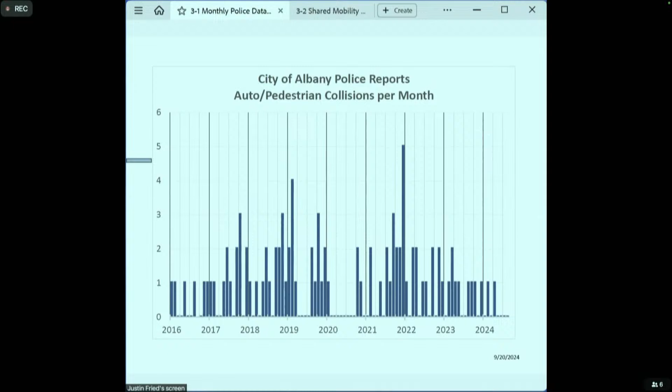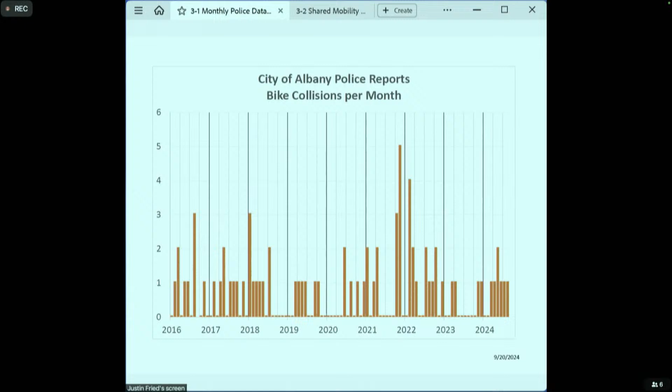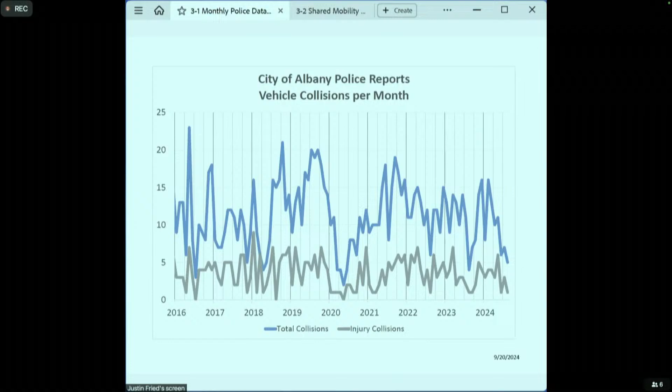Thank you, Chair. First presentation is the monthly police data reports, presenting for the months of July and August. There were 0 pedestrian-involved collisions for both months. There was 1 bike-involved collision reported in each of the 2 months. There were 7 total collisions reported in July and 5 in August, and of those collisions, 3 were injury collisions in July and 1 in August. There were 62 citations issued in July and 50 in August, and 4 DUI arrests were made in July and 3 in August. That concludes the police data report.

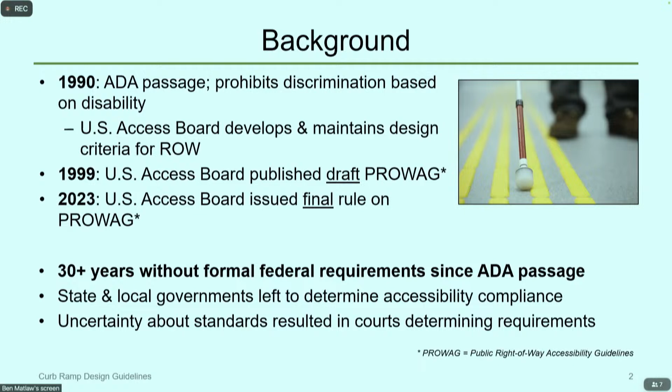To talk briefly about project life cycles in general, it should be obvious, but we want to finish any design modifications during the design phase. We don't want to change design unless there's some kind of unforeseen technical issue, like digging up a utility that was unknown and having to work around it.

There are a few reasons we don't want to make modifications after design: significant cost increases, risk and dispute issues escalate especially with the contractor, and it's generally just not as feasible without additional funding and time. We're locked into a contract, for example, in the construction phase — you can't just tell them to hold on, we need another month or two to work something out.

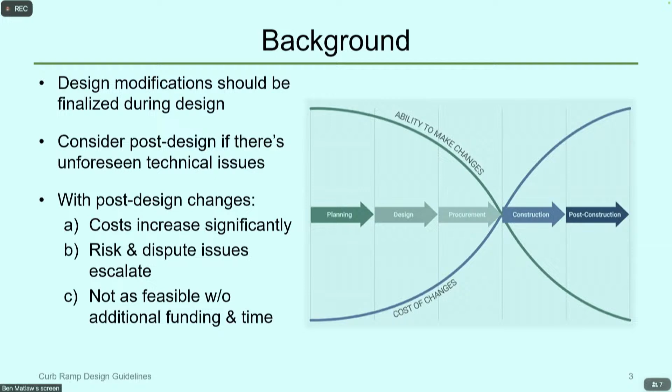So the intent of the curb ramp design guidelines is to help formalize and streamline that project delivery with curb ramps. It will become a formal reference for city staff and consultants.

Its ultimate purpose is to generally describe site constraints when we're working in the right-of-way — what constraints need to be considered when designing for curb ramps — generally summarize the ADA and PROWAG requirements, and summarize the City of Albany's discretionary preferences, which are recommendations from the Transportation Commission on curb ramps. Ultimately, it provides guidelines and a methodology for selecting preferred curb ramp types and details.

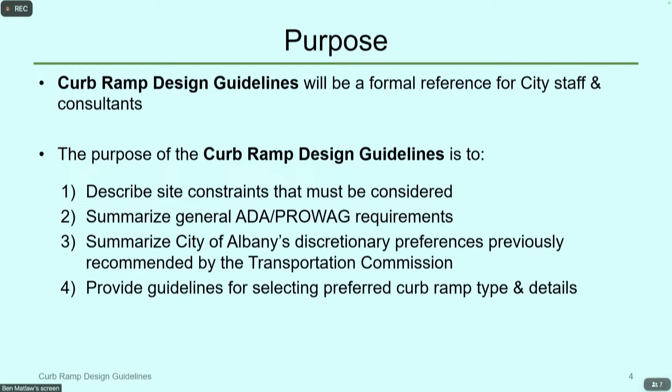So there's a lot I need to get through to set this up and talk through these preferences. We're going to start with constraints and requirements — what needs to be considered during design and what must be part of a curb ramp — and then move to discretionary preferences and the design toolbox.

The preferences in particular is where we're looking for further comments and confirming some of these preferences with the commission — discretionary preferences meaning what the Transportation Commission, as the right-of-way reviewer for these designs, has directed staff to look at.

Our design toolbox informally covers some of the things we include with curb ramp design regarding safety and aesthetics, to try to formalize our designs. That leads to our curb ramp selection methodology — weighing all these requirements and preferences to determine how we select a curb ramp at a given corner.

Looking forward, very briefly, the curb ramp design guidelines are intended to be a living document, so looking forward involves a few things that may affect the document in the long term.

So with that, I'm going to jump into constraints and requirements. And at any time, if there's questions, feel free to stop me.

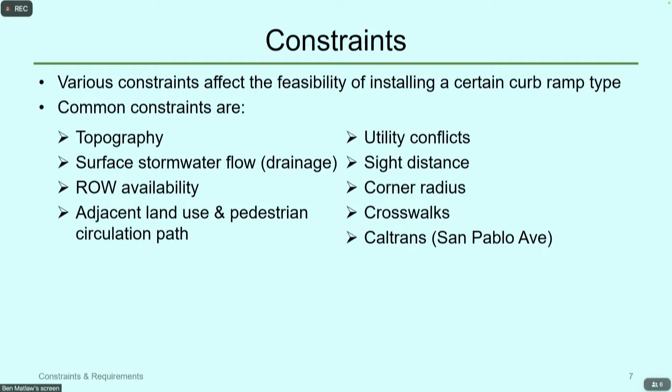I'm going to go over a few of these in more detail because they're generally the more important ones and have larger effects. One of the major ones being topography.

Hilly areas require some exceptions to preferred curb ramps because we need to balance a few things: accessibility, safety, drainage, road design, that are more tricky in irregular topography. When you're working with crosswalks and curb ramps, there's very prescriptive grades and cross slopes, even if there's pretty extreme grades in the roadway.

And it being a hill, drainage is more of a concern. Water typically will go from the high to a low point, just physics. So if you're introducing a very sharp slope, it's going to move down that hill a lot faster. You can imagine a fast flow is more likely to run up a ramp. If it's moving fast enough and pooling in a certain spot, it can get over a curb quicker. There's a higher potential that, if you're not thinking about drainage, it may end up flooding back of sidewalks and getting into property. So it's a lot trickier on a hill.

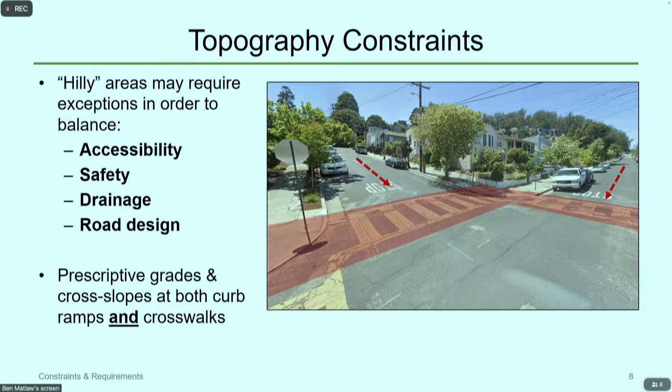Drainage is a constraint regardless of where you are. Hills just make it much more difficult.

Here's a cross-section of a typical right-of-way. You have sidewalks, potentially a planter strip, then a curb, and in the middle is your road. Roadways are typically designed, especially in Albany, with a crown - a high point in the road so that water flows into the low point, the gutters. That curb acts like a channelizing effect so that water stays within the roadway.

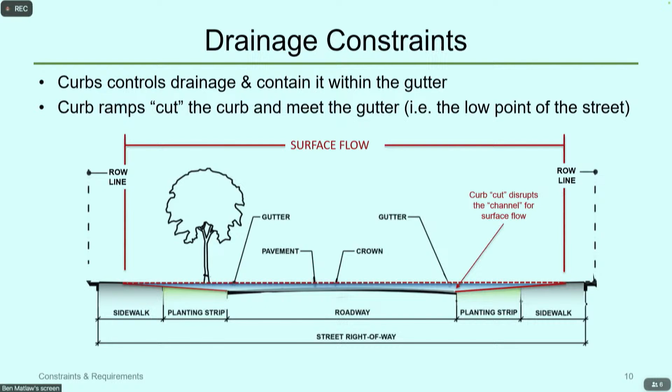You can imagine if we build a curb ramp, we are cutting that curb, which means flow is no longer channelized in the road. It has the potential of going up the ramp into the sidewalk. We are disrupting that channel for surface flow. No matter what you do, there is no way your curb ramp is not going to have some kind of ponding from stormwater - it's meeting the low point of the street.

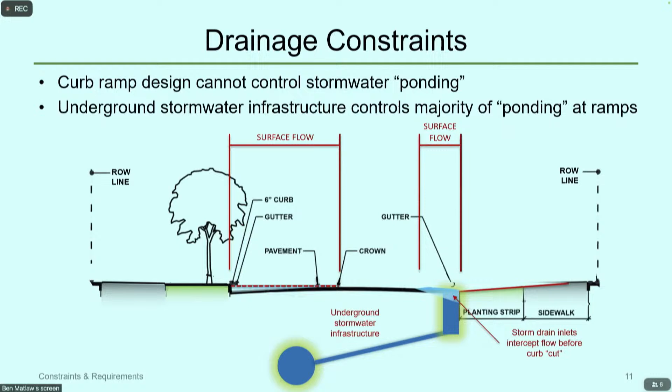It's just where the water is going to go - it's going to go to the gutter. The only way to reduce or potentially eliminate that is to intercept the surface water. You need stormwater infrastructure to intercept it so that very little or a nuisance amount is at the bottom of the ramp - not enough to be a barrier to anybody anymore. You cannot just design a curb ramp to control ponding.

Another major constraint, obviously, is right-of-way availability - just how much room do we have? It needs to fit in the space between the property line and the curb. There are ways to increase that space, with a curb bulb out for example, but that also complicates drainage - you're basically creating a check dam. You also have to consider if there are on-street bicycle facilities, because if that's the case, you may not be able to have that additional curb space.

Class 1 bicycle facilities also have more right-of-way considerations - that's like the Ohlone Greenway, the Buchanan Bikeway. You just need a wider ramp for those kind of crossings.

Now there's also, especially here in Albany, a tricky one: private property encroachments in the right-of-way. These encroachments do limit our usability, and that can be either softscapes like landscaping and bushes, or hardscapes like retaining walls and staircases. And even though they are technically in the right-of-way, they are still private property, so removal is complicated.

For softscapes like landscaping, removal is possible, but again, since we're removing private property, it does require us to talk with risk management, talk with legal staff, and talk with the property owner. You can imagine in a project with six intersections, four curb ramps apiece, four corners apiece, that could potentially be a lot to work with. And realistically, removing some landscaping may not actually buy a lot of room, but it could make a big difference. We don't really know until we're designing.

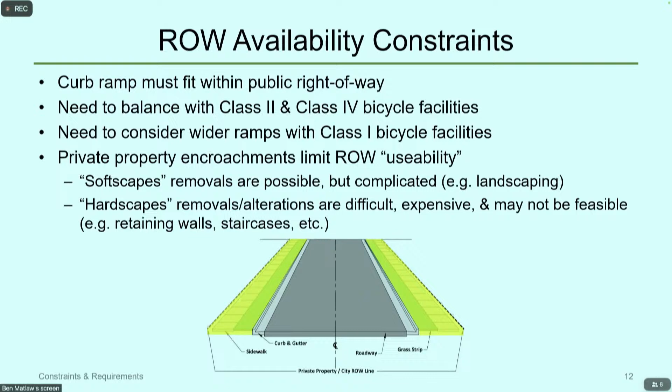Now, even given that, hardscapes are not as feasible to move around. Retaining walls and staircases get very expensive - it may not even be feasible in certain situations. And then there's also fences. Depending on their construction, they might be considered a softscape or a hardscape, but the more expensive and well-designed fences, the harder it's going to be to move around.

Crosswalk constraints - not a huge constraint, but I do want to touch upon this one because it does have an effect here in Albany, and I'll get into more detail later. Generally speaking, the requirement is that a curb ramp - and I'm talking about the ramp itself, not any flares - needs to be within the crosswalk width. It does not need to be centered within the crosswalk. So there's a lot of flexibility in how you place a ramp and a crosswalk, and how that may affect other design elements.

The only one that's a bit more complicated is the 444 crosswalk. That's because the intention of the 444 crosswalk is to have that blank space aligned with the curb ramp - otherwise you're kind of getting into a continental one. It's not technically required, but you go for a 444 because you don't want that interaction with the paint or thermo or whatever material is used. So that does restrict the flexibility a bit on how you place everything and how it may affect other design elements.

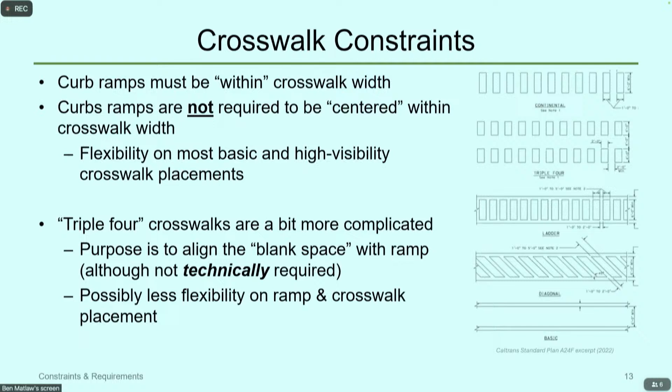And then lastly, San Pablo is a Caltrans right-of-way. Caltrans has final review and approval on our curb ramps, so we have to stick to their standards. We can deviate from them, but they need to realistically be justifiable and necessary. And ultimately, even if we think they're justifiable and necessary, they can still say no because it's their right-of-way and they have ultimate approval.

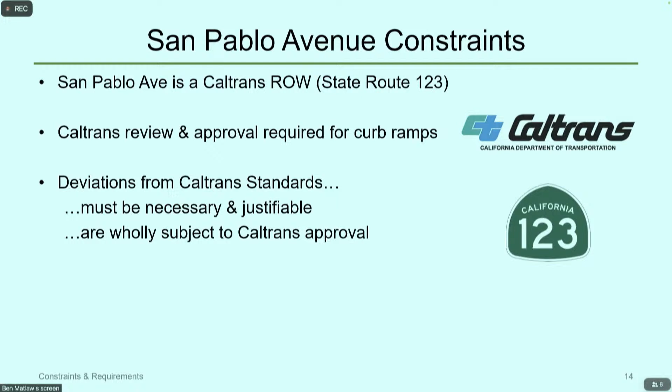So I'm going to get into the requirements very briefly, and this is going to help set up discussion for discretionary preferences, toolboxes, and then the methodology. But before I get into that, I just want to talk about what are the types of curb ramps. So we have our perpendicular curb ramp.

This is where - my laser pointer's not showing? Oh, okay. Gotcha. This is where, if you're using a wheelchair, the landing is at the top. This is where you reorient yourself to the ramp, and you come down the ramp perpendicular to the curb.

A parallel curb ramp is when you're coming down parallel to the curb, and then you turn at the bottom landing. The last one is a blended transition, and we use this interchangeably as a curb ramp, but technically blended transitions are not curb ramps - they have their own different requirements. They actually don't have as much flexibility with grades and slopes. They're defined as a wraparound connection at a corner, but I like the definition that it's a flush connection when there's no curb to cut through, because in terms of design, it's basically just an extension of a sidewalk. It doesn't have the higher grades that a curb ramp allows for.

To preface some of this conversation and discussion, I want to say that when you're designing, you may think of these curb ramps as individuals, but realistically you have to think of the corner as a whole. You have to think of the interaction between two ramps, because especially if it's a tighter right-of-way, you can't assume you put one and then go to the next one. You have to think of how these are interacting with each other and how they fit together.

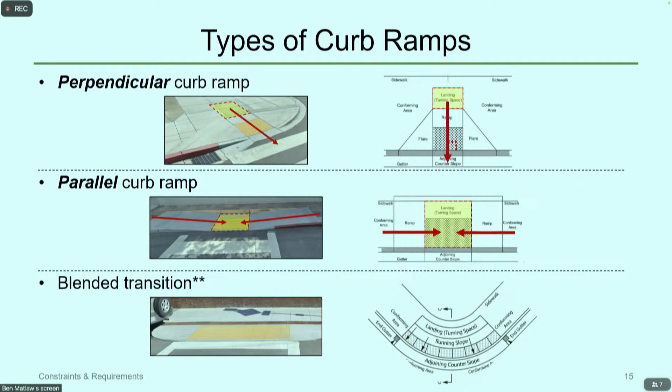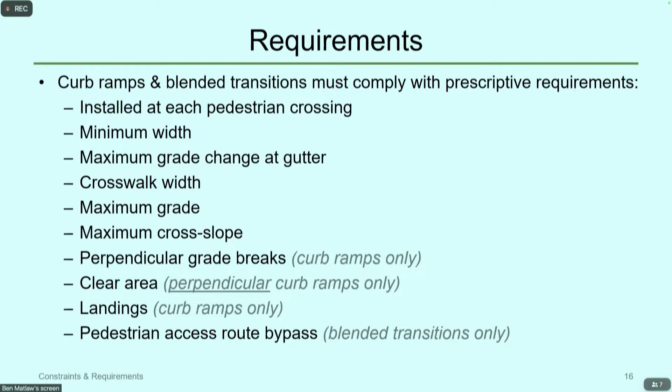Do you get a higher score if you make a mistake at a location with a higher number? No, it just haunts you forever — when you walk by there, you're just like, darn it.

Is it possible that it's impossible to satisfy all those constraints in a given crosswalk? In a given crosswalk, yeah — this is feasible. Satisfying all those constraints is feasible. Oh, you have to satisfy all this. And it's often done, but this is what makes it very complicated and why there's very little wiggle room when we're designing these, and why there often has to be a lot of iterations before we can say, okay, this is what actually works and meets accessibility requirements.

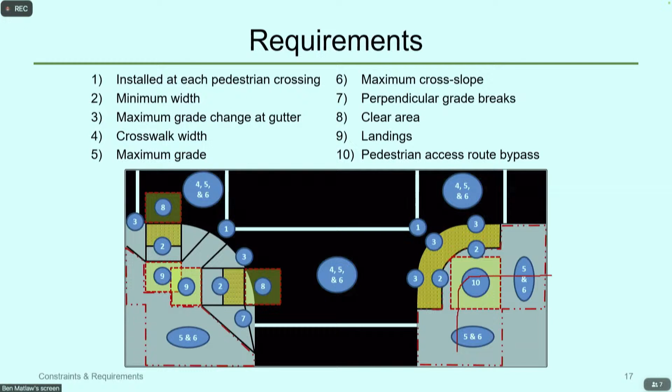Okay, so I'm going to go to discretionary preferences and design toolbox. This is kind of where we're looking probably for the most comment. It's something we can wait till the end to discuss, but feel free to stop me during this if you want to talk a little bit more about preferences, or if there's something we missed, because to our knowledge, this is the capture of everything that we've kind of seen during discrete projects in one place. So what are these?

As I said, these are previous recommendations by the Transportation Commission regarding curb ramp design and construction. These came up at different projects, and we try to remember them all in our heads, and now this is a document to write them down in. So these are specifically things that are not required by ADA, PROWAG, or the building code. These are optional features and preferences desired by the community, and we incorporate them to the best of our ability during design and then during construction.

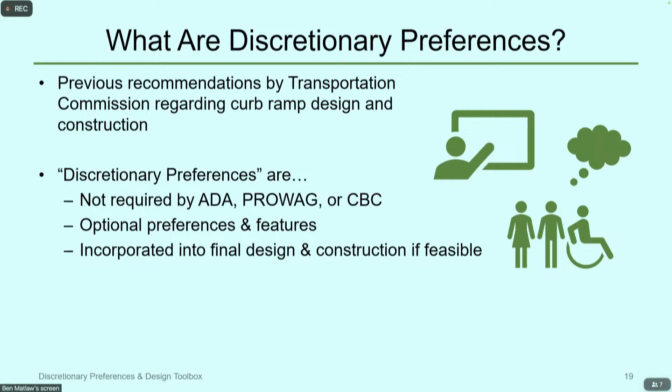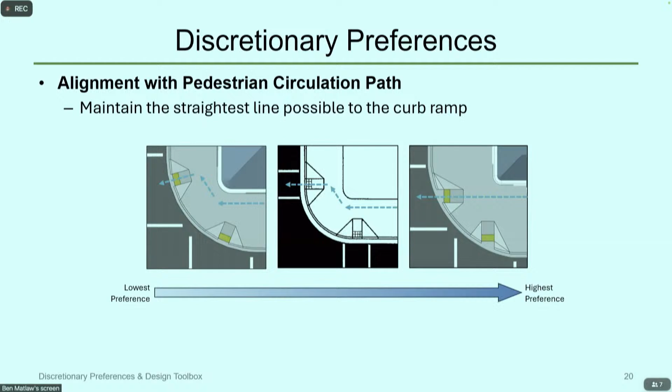Edge treatment: when we're placing retaining curbs, we want to make sure that they're not within the pedestrian circulation path. That way there's not any tripping hazards, and in particular that the corners of these retaining curbs are rounded. Now, I want to specify, it's been communicated that we want these rounded corners, but we are pointing out interior only because we want to keep Public Works' desires to keep the retaining curb at the gutter a straight line, and I'll talk about that when we get to our toolbox. Otherwise, these corners are rounded.

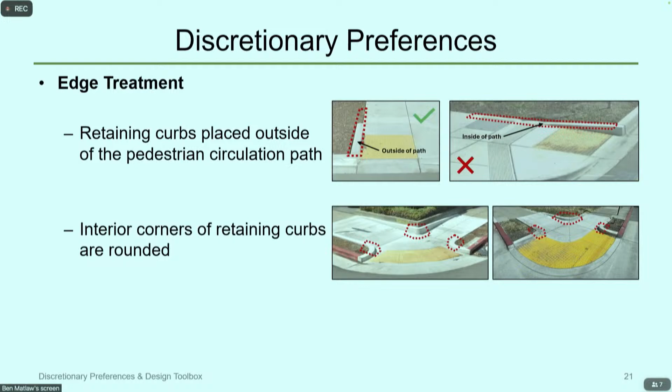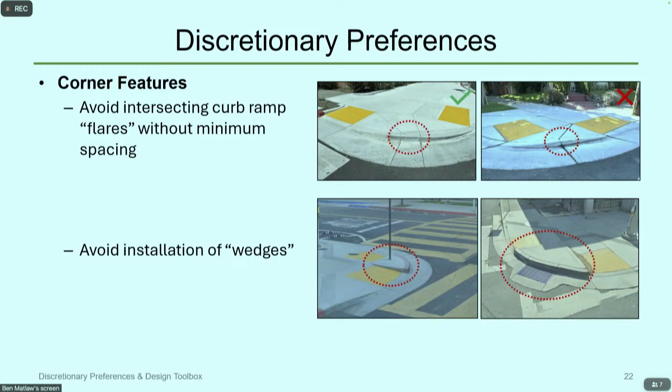There is less flexibility on crosswalk placement, as I mentioned. We can't move that crosswalk around. So if parking is a concern, there's an Assembly bill where basically on approach, 20 feet of red curb is prohibited to the edge of crosswalk. In areas where you might have a driveway near the crosswalk, we don't have a lot of flexibility, just kind of nudge it a few feet to try and get that parking space. It's pretty much going to go away because these crosswalks do not have flexibility to move on most ramp types.

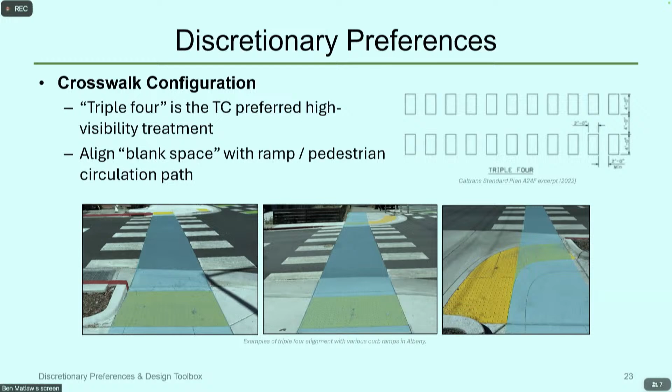So what if discretionary preferences don't work? When we do deviate from these, our process will be to review it with the commission for their feedback. I'm thinking of typical situations in Albany, I can see this happening in Albany Hill. There's a lot of things we need to think about when designing, and it's very likely we're going to have to make some adjustments and compromises.

Other situations I think of are the southeast part of town, like around the Albany Terrace area. Those are really tight sidewalks with very little room to work with, narrow streets, so probably not much flexibility to adjust curb lines. And lastly, anywhere we have Class 1 bikeways and facilities like the Buchanan Bikeway and the Ohlone Greenway, we're considering more than just pedestrians, so there's a lot of extra review needed because we're also talking about bicyclists and other users using these curb ramps.

So that's kind of the capture of discretionary preferences. I'm going to move on unless there's any questions or comments on discretionary preferences that we may not have captured here. I just have a quick question.

Are you going to discuss roundabouts at all in this conversation? They're kind of like curb ramps that go on in a big circle. You mean like the wraparounds at corners? Well, there's lots of roundabouts, but we have like Calusa Circle. I just wonder if there's any difference in designation or concerns from an engineering perspective about how you build them.

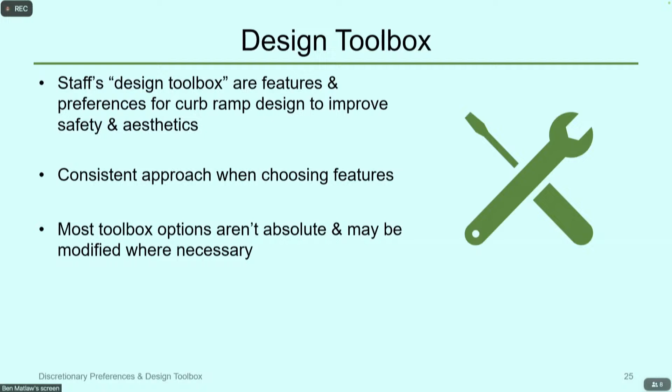I say that with one exception right here, is detectable warning surfaces. If you've traveled around the country, most of the time they're red. California is unique because California Building Code requires them to be yellow. It is an absolute requirement - we are not allowed to change these colors if it's for a curb ramp. That being said, that is the only requirement in here. The rest of these are not absolute.

So we typically design these, we want a 5-foot width minimum when we start design. 4 foot is the minimum requirement, but we like to start with 5 feet. And we align the domes of the detectable warning surfaces with the expected path of travel. It's a little hard to visualize because it's a bit blurry, but the arrows are kind of showing your typical direction you're walking, and then that grid shows how we align the domes so it's matching up with the expected path of travel.

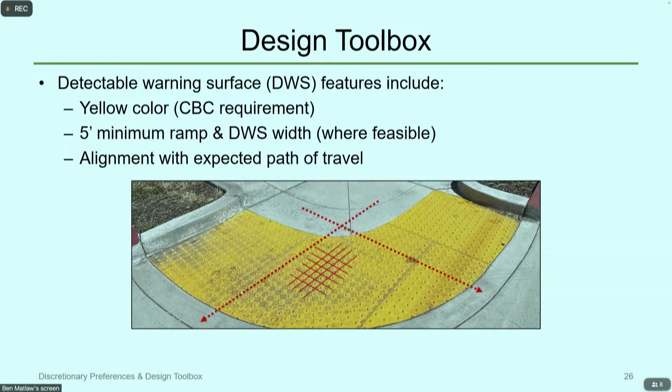So back to that retaining curb I was talking about earlier, we want to keep those retaining curbs straight at the gutter because it reinforces directionality for people using cane detection. So if they're using that cane, if it's rounded, it might start sending them the wrong way, but if it's straight, it's showing them the proper direction of the crosswalk. And that does give us some flexibility. If we have angled crosswalks, maybe it would be appropriate to angle the retaining curbs there, but typically we're looking at a right angle at the gutter.

When we're doing these retaining curbs too, like this bottom left image, for people who aren't paying attention, it is a potential drop-off risk. You might roll your ankle, hurt yourself because you walk off a 6-inch gap, essentially. So what we want to do is put some kind of visible and detectable difference. That way, even if you're not paying attention, you can kind of feel that, hey, maybe I should reorient myself. We do that either through landscaping or through something like a decorative concrete. The decorative concrete on the right is an example on San Pablo that we just installed.

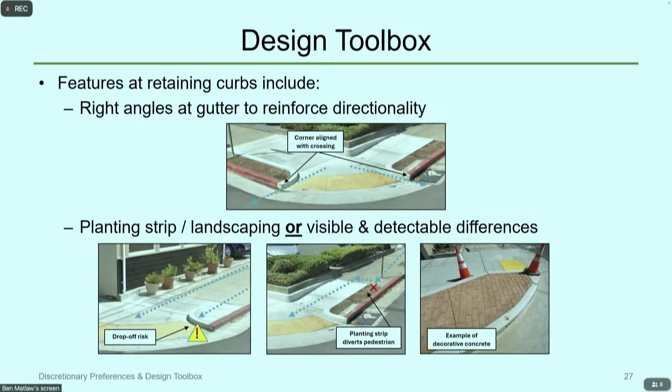So where feasible, we'd rather put in a planting strip or landscaping. But if it's going to be too narrow for landscaping where it won't be very effective, or if it's on a hill where it'll just wash out, or if it's a high trash generation area, we'll go to the raised curb.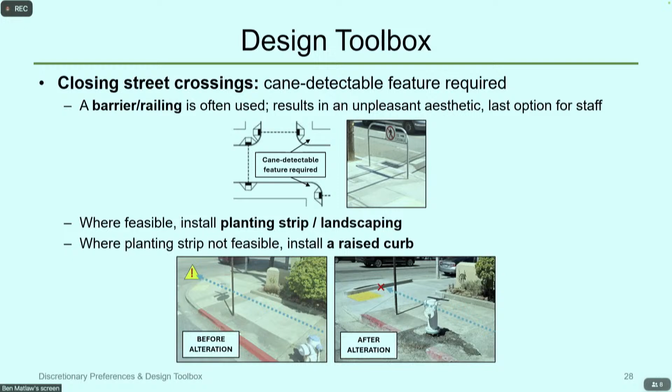The last toolbox kit piece I'm going to talk about today is storm drain inlet locations. We want to design so that when you're walking around, even if you're not using the exact ramp itself, when you do walk off that curb, you're not stepping into a storm drain. It could be an issue depending on the storm drain inlet, may not be an issue, but we just don't want you walking over it.

So what we're looking at are those top two images, where that storm drain is kind of completely out of where you're expected to be walking, out of the crosswalk and out of that back of sidewalk line.

Sometimes, depending on project scope, cost, all sorts of things, it may not be feasible to move an inlet. So we want to try and alter that path direction, either with a planting strip, preferably, or also a retaining curb. Those are those two middle images.

The bottom two are what we kind of want to avoid, where if you're walking and not paying attention, you could step right on the storm drain. But I do want to stress those bottom two configurations are compliant in terms of accessibility requirements. It's just what we want to avoid. We want to design the top two, not the bottom two.

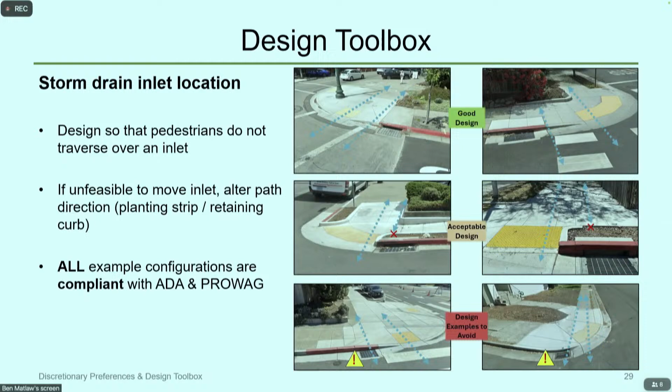So I've thrown a lot of information out there, a lot about requirements, a lot about discretionary preferences, a lot of things about curb ramps. Curb ramp design is difficult. We have to look at site constraints, we have to look at accessibility requirements, we have to think about safety in general, things that might not neatly fit in those two boxes. And then we have the discretionary preferences that we also need to try and include. So there's a lot going on.

As I said earlier, curb ramps shouldn't be designed as individuals. You really need to think about how they're working in conjunction at a corner. In Albany, outside of a few select streets, we have very narrow right-of-ways, so our curb ramps are going to be very tightly paired, or they're going to end up merged.

So ultimately, the intention at the end of this document is to help streamline our project delivery and design by outlining a methodology for choosing curb ramp types at a typical corner, which I'll get to in a second.

So what we did was we simulated different corners with different curb ramp setups, sidewalk ramps, and blended transitions. I did not talk about sidewalk ramps today because they are not curb ramps. They're even more complicated in some regards, but essentially it's when you're going at a steeper slope along the sidewalk.

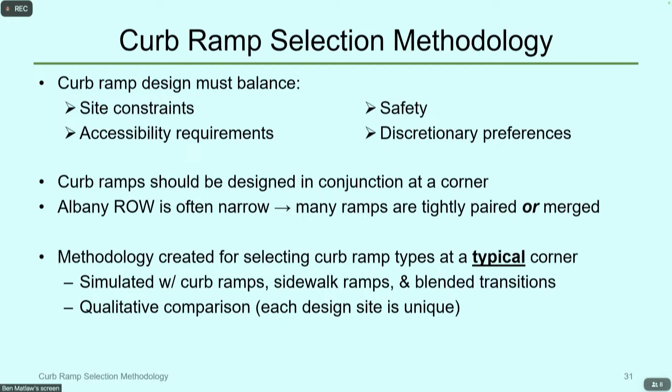This simulation is qualitative. Every design site is unique. A ramp that might need X feet at one location may need X plus 5 at another. So this is to qualitatively compare them to each other at a typical corner. And what am I saying at a typical corner?

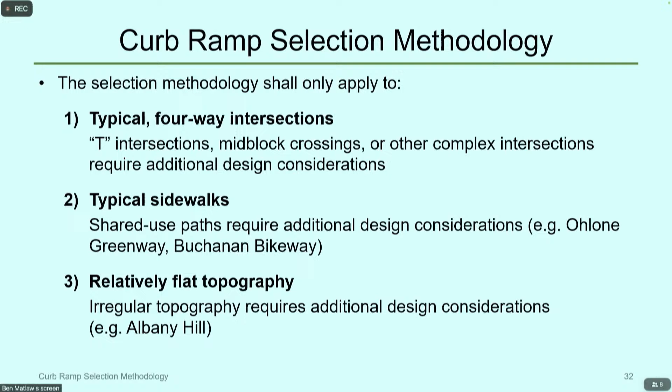So with that in mind, this is kind of a breakdown of different simulations at a corner. I'm going to simplify this in a minute, so bear with me. The left column, we did use the Caltrans naming convention that pretty much everyone uses, and I'm going to visualize what these look like shortly. Just so you're wondering, what is A, B, C, D, G, F, R, X?

So the columns here: user comfort, ease of use. This is how easy is it to navigate a corner? Typically if you're using a wheelchair, is it very tight? Is your turning space constrained? Are you making very hard turns just to get around the corner? The second is hazard tripping risk. This, I think, is fairly straightforward. Are you placing things in the path that may be a safety risk, like a wedge?

The third is ponding potential, and I want to be clear, this is where there's no stormwater infrastructure present. You can kind of ignore this column if there's a storm drain inlet, which, as you may or may not have seen with a lot of project reviews, we don't have a lot of storm drains at our corners. And like I said earlier, curb ramp design alone will not control drainage, but depending on your design, it may change the amount of water you're seeing. You might see a ton of water versus an annoying amount of water, one that still may be an issue for a wheelchair, but is easily passable by other folks. And the last one is just generally the amount of space you need, the expected width to fit that curb ramp.

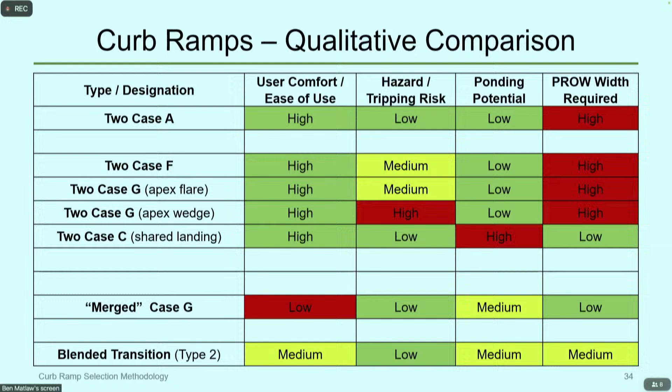So we eliminated some of these configurations that had relatively the same amount of public space but had more drawbacks. So we got down to these 7 configurations: 4 that we might be appropriate for where we have a lot of space, and then 3 where we're more constrained. And these are what these 7 look like.

I'm going to try and go through this a bit quickly, but feel free to stop me. Before I do that, I want to explain some of the details here. This hatched marking is basically where it needs to be level, a very flat area. That's because this is your turning space for a wheelchair. Anywhere you're seeing this letter A with this kind of greenish brown, that's where we might install a planting strip or a decorative stamped concrete. These dark grays are retaining curbs here, and these dark grays at the apex of the corner are those wedges that we were talking about earlier. And these corners will be rounded in design. For my sanity when drawing these, I made them straight lines, but they would be rounded realistically.

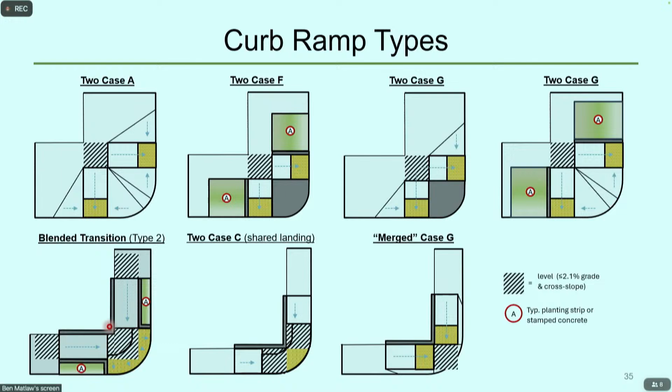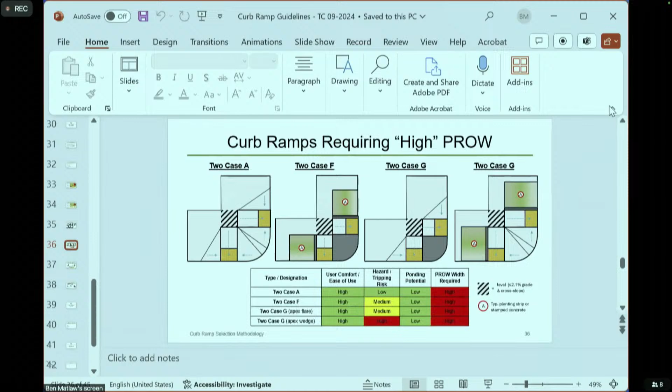So I'll start with the top 4, which are kind of the high public right-of-way. I'm going to try something because I want to play around with these a little bit, and hopefully I don't break this presentation. This one will be a little interactive, so I can explain some things visually to the best of my ability.

So these are kind of where we have a lot of space. You can see when we're doing those, these 2 case A's with that little flare separation, they take up a lot of space. You can kind of relatively see, you're already seeing a decent amount more space compared to if we were to do an apex wedge. That being said, if we didn't do that separation, there is some flexibility, and I'm going to try and show that. So you can actually get a similar amount of space that the wedge does, but it does require you to kind of have that intersecting flare. So you can move these ramps closer to the corner.

And that gets you a similar result, it can use less space, similar to Apex Wedge, but it does mean that we now have this intersecting flare, which is generally a discretionary preference from the community that we want to avoid installing. But I just want to highlight that you can fit these into tighter spaces if you do that.

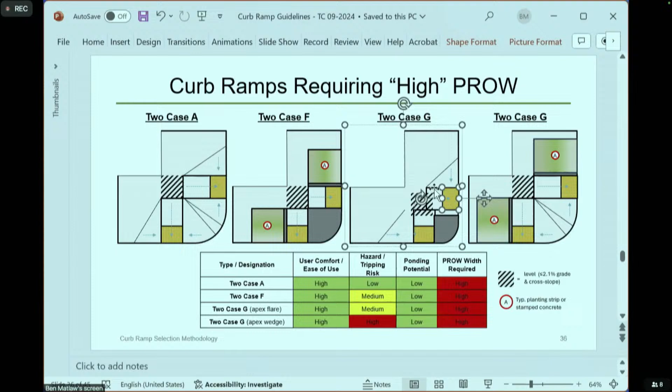Does that change the slope of the ramp? It can, and this is only in situations where you have the flexibility. Generally on flatter topography you might have this flexibility, but we typically try to avoid installing wedges because of the tripping hazard. But you can see, relative to that 2 case A on the left, how much less right-of-way this is using. So on a flat street, this could be very easily put into a bit more of a tighter right-of-way.

Just fix that. Any questions before I move on to more constrained widths?

Seems like the first one and the second one, or the third one, are better for wheelchair, maybe? Because think about it, if they're not using the ramp but just simply want to make a turn. Seems like 2 case A and 2 case G offer more space for it to turn smoothly. I never sit in a wheelchair before, but that's what I was thinking. If you're driving, the second one and the fourth one seem like a 90-degree turn. But for the first one and the third one, you dip down and go.

I don't know, yep, these perpendicular separated ramps are generally the most comfortable we can get. But they'll have slight drawbacks potentially when you're comparing. Generally anywhere you have two separated perpendicular curb ramps like this, it's the most comfortable configuration you're going to get for users. But again, it also requires the most amount of space.

So let me open this back up. Okay, I got rid of my notes.

That's right, so when we're working with tighter right-of-ways, thank you, we have blended transitions and then these two case Cs, which we actually call - I think our standard calls that middle one a modified C, and then a merged case G.

I'll talk about the blended transition first because that's kind of an in-between where it requires a little bit more space than the two on the right, but less space than the ones we were just talking about. This is what I was talking about, combining a sidewalk ramp and a blended transition. I'm not going to get too much into the technical details, but internally we call it a type 2 - that's not a designation you're going to find anywhere else, we just call it that. Generally speaking, that's what can fit where we have a little bit more wiggle room. It's a little constrained with the turning space, but it's pretty comfortable compared to the ones on the right.

The one on the far right - so the two case C and the merged case G, these are where we just do not have a lot of room, we're working with very tight spaces. I'm sorry, this table and these two should be red to signify that. But it requires - oh no, it's green. Sorry, never mind.

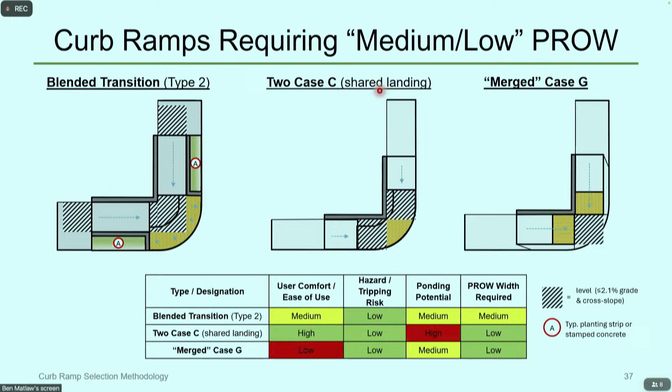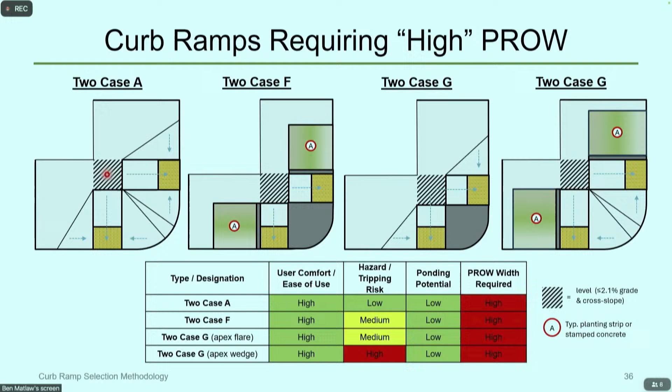I did not talk about this modified case A with ramp downs because it's complicated, but essentially, it's two case A's, but we do ramps down to a landing that then ramps down the curb ramp. It's a very rare situation, but it's in our toolbox in case we need it. Essentially, we're ramping down here, like this blended transition, but then it leads you to this point on the two case A. It needs a lot of room, so it's very rare, but it could help when we have a bit more difficult elevation we're working with.

Now, going from the blended transition type 2, again, if we still don't have enough room to get that to fit, we ask ourselves, is there going to be a stormwater system put in place at that corner? If the answer is no, we'll probably go forward with the merged case G configuration. But if there is going to be stormwater infrastructure, we would do the modified C, or the two case C, however we want to call it, because it's a bit more comfortable to navigate.

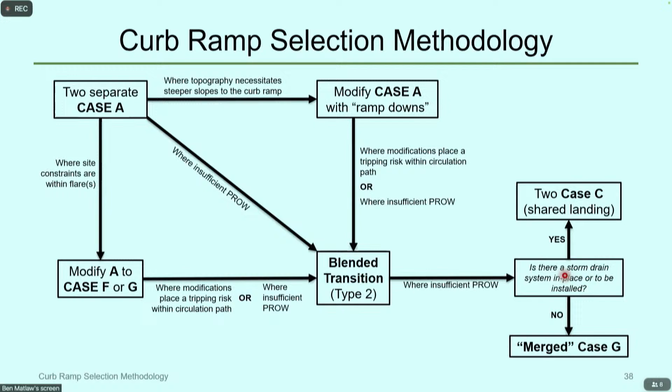So this kind of sums up everything we were talking about with how we want to have a uniform approach at a typical corner: we use this methodology and throw in our toolbox for the more aesthetic and safety elements. And then just very quickly, as I mentioned, this is a living document. The City of Albany, we're looking to update some standards next year, time willing, and that might incorporate some things like making sure you put the rounded corners in the interior. Things like that might get captured in our standard details.

Or if there's anything where our details affect the curb ramp guidelines, I don't think so, but we would update it. The active transportation plan is in the works, and it may end up being a vehicle for the community to have preferences on curb ramps. I don't really know, but it is a plan that deals with how pedestrians move around. So if there is something like that that comes up, we would update the curb ramp guidelines.

The watershed management plan probably won't affect curb ramp guidelines per se, but it is going to help us put together a blueprint for future stormwater improvements, which may help guide how we do end up choosing the curb ramp at a corner. Because if we know where we're installing stormwater, we know, okay, we want this merged case. We don't want the merged case G, we want the type C, the two-case C. PROWAG, as I mentioned, this is technically still not enforceable.

The two federal agencies that require it to be adopted before it's enforceable are the Federal Department of Transportation and the DOJ. The Federal Department of Transportation is closing their comment period this month, so there's a good likelihood they will be adopting it soon. The DOJ hasn't indicated when, but I'm hoping it's by next year so this is finally closed and becomes enforceable guidelines.

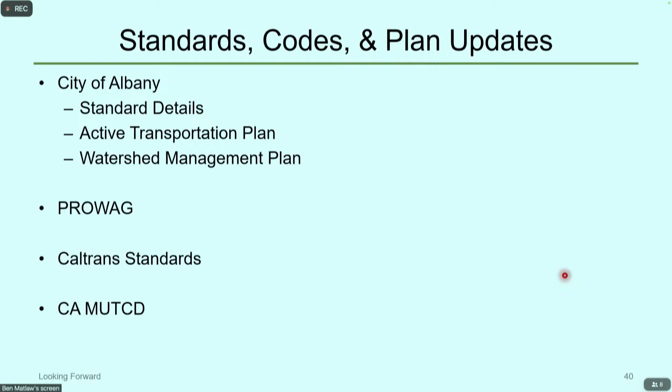This tells us how our signs are supposed to look. Not a huge effect, but some accessibility signage is basically regulated through this document. So anytime we need to put that, say on our pedestrian barriers, there's specific signage. If this document ever changes that, it might affect our guidelines with very minor tweaks.

And with that, I'll open it up to final questions and comments.

Do you ever interact with the Center for the Blind, asking them about safety issues for them? Seems like we have some beta testers out there in Albany, intentionally.

We generally have not recently. They've actually communicated to us they like it when it's not compliant because it's a better training ground for them. I've heard that. But at the end, putting automated vehicles in San Francisco is the hardest possible situation.

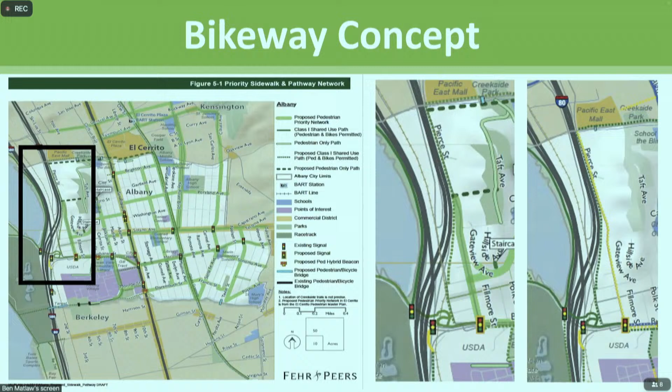Segment 2 includes a connection from the end of segment 1, the south side, along Pierce Street through Caltrans property and city-owned property, including Peggy Thompson Pierce Street Park, that is not complete. And then the development plans for the Saha Affordable Housing Project at the northeast corner of Washington Ave and Cleveland Ave include a path alignment that would bring the path along Cleveland Ave and eventually connect it to Buchanan Street. This is a much more simplified version explaining that and shows the very rough alignment of the path.

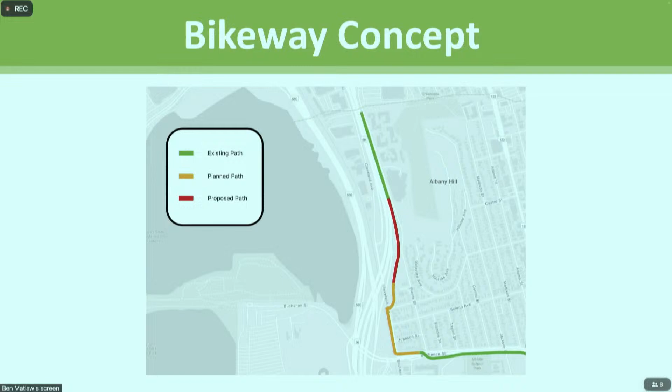So the city staff have already are in the process of preparing an application for the MTC's Regional Measure 3 Safe Routes to Transit and Bay Trail Grant to cover a portion of the project's design and construction phase funding. Upon reviewing additional grant opportunities, staff has determined it's in the city's best interest to apply for a second county-based grant for the Bikeway connection project to close the funding gap. And this is through a grant called the 2026 Comprehensive Investment Plan, which is funded by Alameda CTC, or the Alameda County Transportation Commission.

So that would bring us to having applied to 3 grants this year, at least this half of the year. The first grant that I participated in was the Kains Adams Quick Build Bikeway project in June, and then we're proceeding with this MTC Regional Measure 3 grant, and this third grant would be a second grant to help to fund the Pierce Cleveland Bikeway project funded by Alameda CTC.